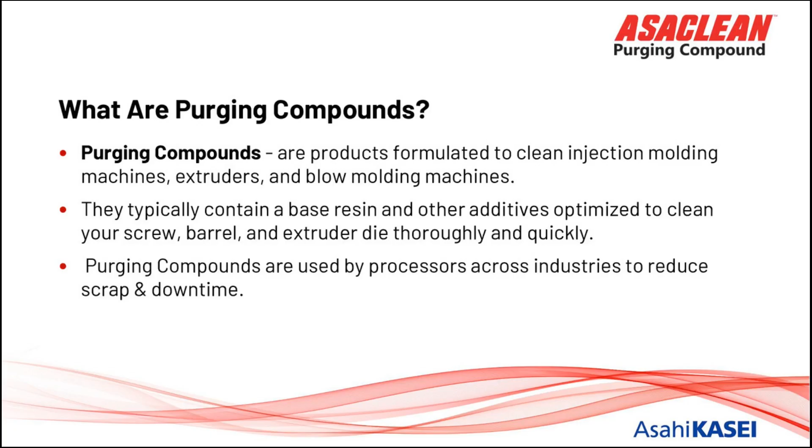Okay, Purging 101. First of all, what are purge compounds? Purge compounds are products formulated to clean injection molding machines, extruders, and blow molding equipment. They typically contain a base resin and other additives optimized to clean your screw and barrel, extruder, and die thoroughly and quickly. Purge compounds are used by processors across the industries to reduce scrap and downtime.

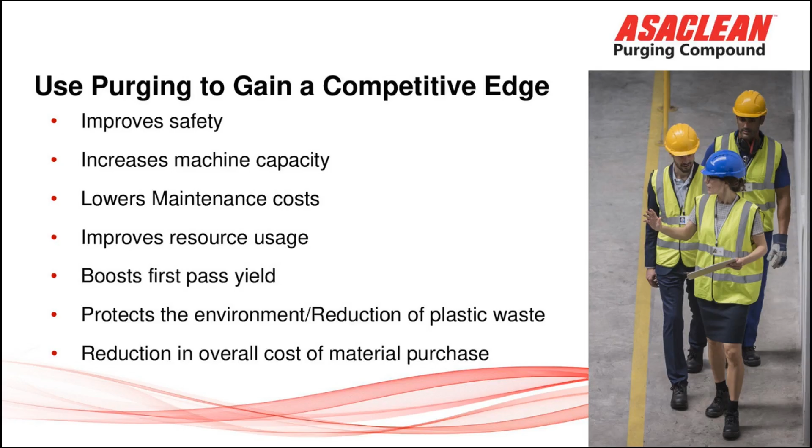Basically, purge compounds are going to give you a competitive edge. We're going to improve your safety, increase machine capacity, lower maintenance cost, and so forth. Most companies that use purge compounds see the benefits almost immediately.

When we're talking about purge compounds, we have to touch base on a few different topics. Obviously, we have to know what your process is: injection, extrusion, blow molding, what type of resins that you're running. What are we trying to do on this purge? Are we cleaning the die? Is it downstream equipment that's the problem? Are we talking about screw pulls? And then we're going to get into the types of purge compounds that could be effective in your specific situation.

As you see, there are 3 that we offer: mechanical type purge compounds, chemical purge compounds, and a concentrate that you can mix with any carrier resin, or the majority of resins that are out there. There are a couple of exceptions.

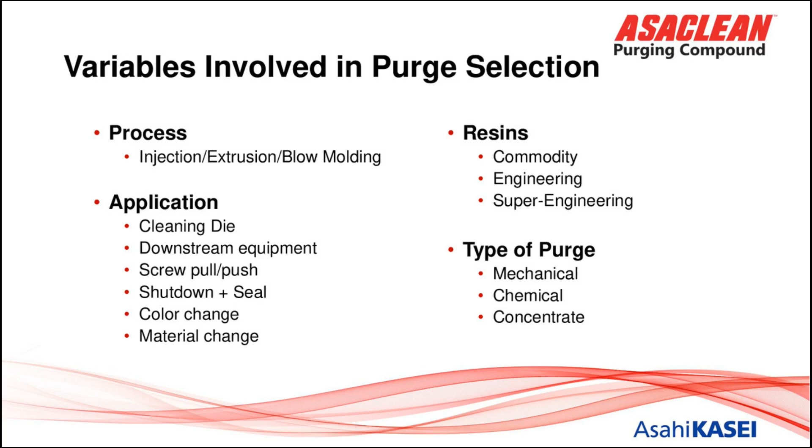We'll first talk about mechanical purge compound. Mechanical purge compounds are really easy to use, number one. You're basically running the product through the machine at a high velocity in effort to clean the machine. There's no soak time involved. Let the machine's power do the work.

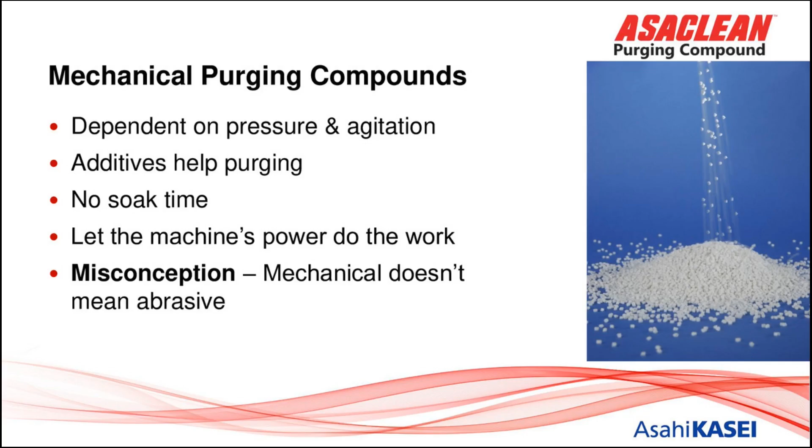Typically 2 to 3 system volumes of a mechanical purge will get the job done. If you were to use round numbers in case of an injection molder, if your machine's screw and barrel holds 16 ounces, you'll typically go between 2 and 3 pounds of a mechanical purge to get the job done.

Chemical purge compound, a little different animal. This is really, really good in extrusion applications, and the reason for that is because it expands. It gets into the negative flow areas very effectively, a little bit more effectively than a mechanical purge can. It's great for hot runner applications as well, and it gets into the negative flow areas and dead spots very, very effectively.

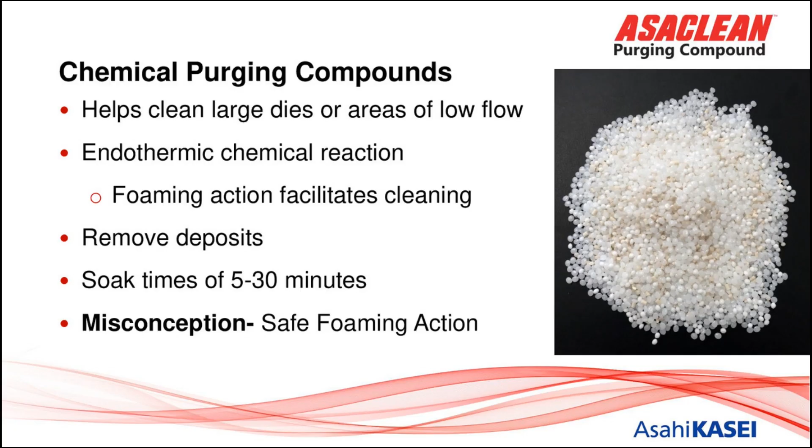Typical soak times can range depending on the situation that we're working on. I've used chemical purge compounds almost mechanically, just running the product through the machine to get the job done. We've had very short soak cycles from 5 minutes up to 30 minutes, and those longer soak cycles typically take place in really hard to clean equipment like extrusion blow.

Concentrates. This is a very unique product that, to my knowledge, none of our competitors have.

As I mentioned, you can mix our concentrate with pretty much any resin that you're processing, with a couple of exceptions. Typically, our mix ratios to start are 20% concentrate to 80% carrier resin, which makes the product extremely cost effective and works identically to our ready mix chemical purge.

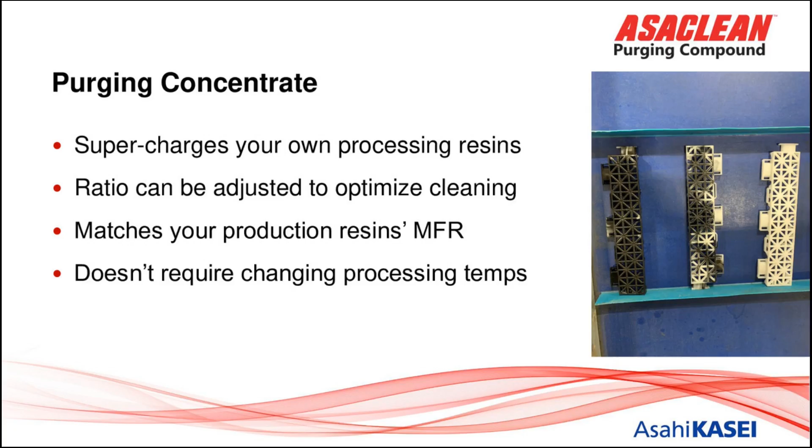When we're talking about injection molding, typical areas of hang up are the screw and barrel, the nozzle, the check ring, and troublesome hot runners or hot manifolds.

Essentially, we normally put the heat where the problem is. So in the case of injection molding and a hot runner, screw and barrels can mostly stay at operating temperature, and we need to heat up the manifold.

That's on a case-by-case basis, determine what you're trying to do and how you're trying to process. But the reason for that is we want to increase the heat in areas that are troublesome, number one, and that added heat aids in the purge process.

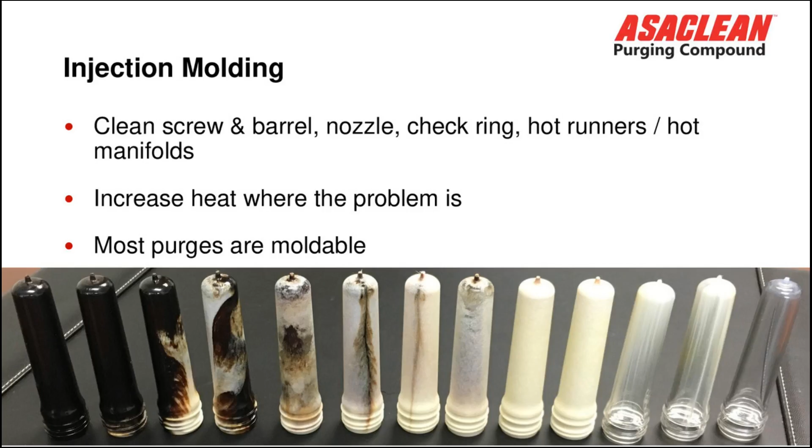One of the cool things about the products that we offer is most of our purge compounds are moldable, so you can actually make parts with the products.

Extrusion. Again, with chemical type purges, they're going to expand in low pressure environments. They work really, really well in twin screw applications. And it also cleans the areas on vented barrels close to the ports and vents.

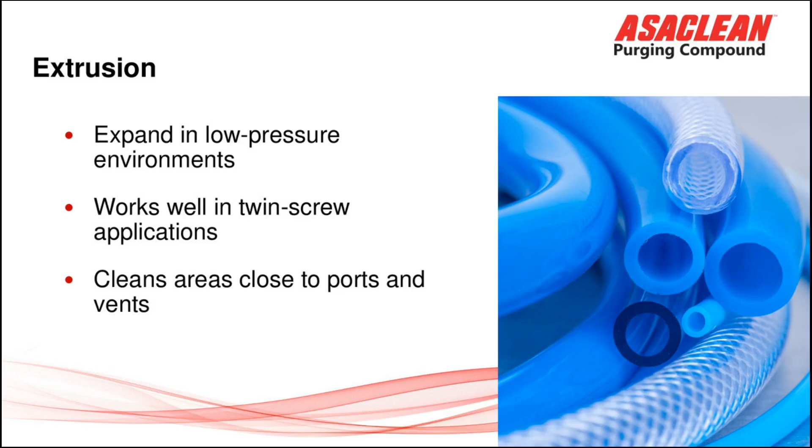Options that hurt efficiency: a lot of people I see use regrind. Now, regrind is not designed to clean. Anytime we compare a purge compound, a commercial purge compound, to a regrind, we normally come out way ahead, on average of at least 80% or better.

Other DIY options are largely ineffective and inconsistent. I can't tell you how many home remedies that I've seen over the years, but they typically just don't work.

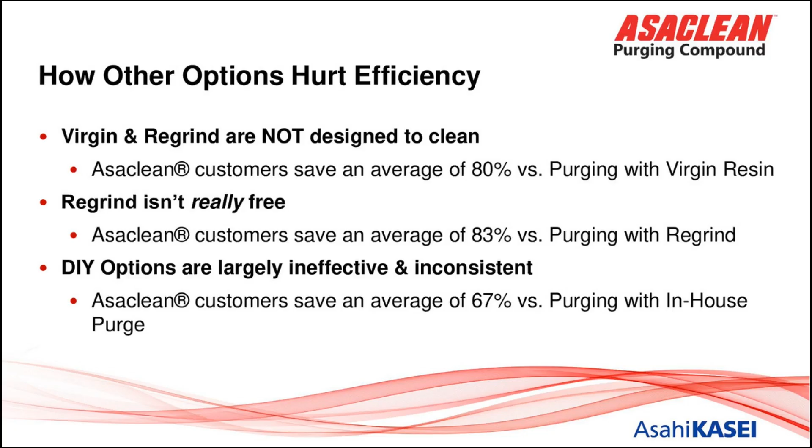Auto purge settings. Yeah, those sabotage your savings. And there's really two reasons for that. One size doesn't fit all—your auto purge settings are really not able to be modified to any degree. And auto purge really doesn't account for cost per purge.

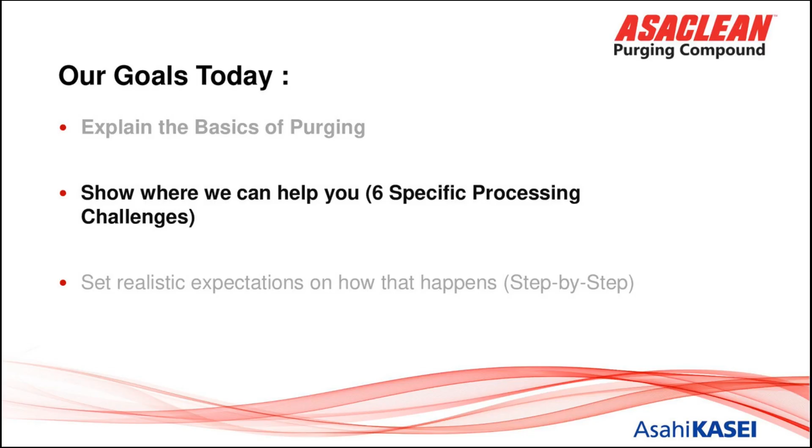We're going to start getting into the 6 specific areas where we could be of help. They are, and I'm sure you're familiar with these: color and material changes, contamination or black specks.

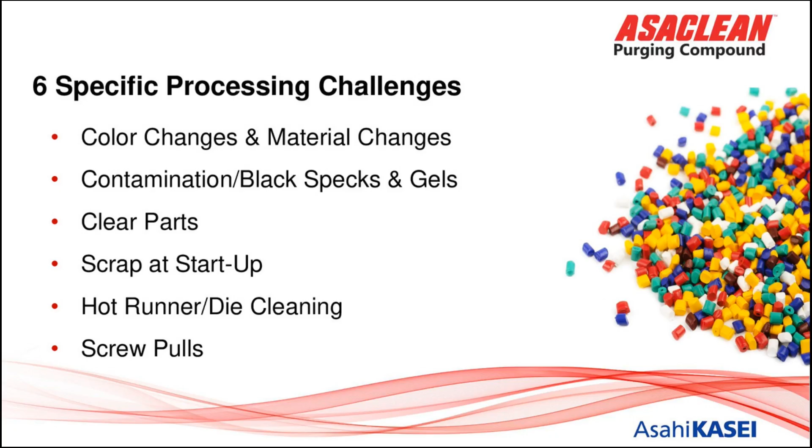If you're processing clear parts, those parts have to be absolutely perfect. We have a way to help you with that. Scrap at startup—startup can mean shutdown as well. Hot runner die cleaning and screw pulls. We're going to get into all 6 of those.

Now, this is just a basic diagram to kind of illustrate what happens. And we really don't care if you're running a commodity grade material or an engineering grade material. A lot of times, the majority of the time, the material is going to take the path of least resistance.

And if you could take a look at the sides of your equipment, you'll get color buildup, you'll get material buildup, and you can even get contamination buildup. And if you're not cleaning your equipment effectively, what's going to happen is it's just going to constantly layer and become even more of a problem the longer you continue on that path.

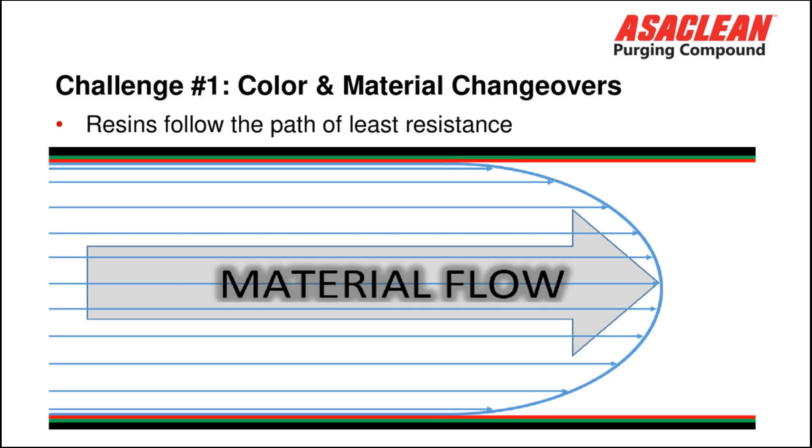In the case of injection molding, we're typically talking about the troublesome areas being the flights, the barrel wall, the check ring, and the nozzle. If you're talking about extrusion, it's not necessarily in the extruders—it's typically in the downstream equipment, like if you have static mixers, melt pumps, and naturally the die.

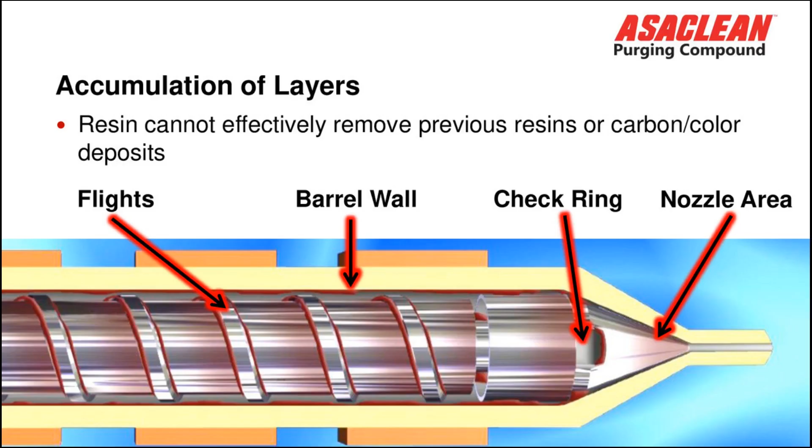Okay, this is an actual description of what we were able to do on one particular injection molding color change.

If you could see, before we started running a white polypropylene, it was taking about an hour and 45 minutes. Machine running cost at $300 an hour. Machine downtime cost $525. If you go right down the list, it'll give you a really quick explanation on what they were doing previously to using our product and what happened after.

Just in time alone, we were able to go from an hour and 45 minutes down to 30 minutes. We were able to reduce the machine downtime cost from $525 down to $150. The amount of purge material used was huge—they were using 350 pounds. We got it down to 80 pounds of our product. Cost saving was remarkable here.

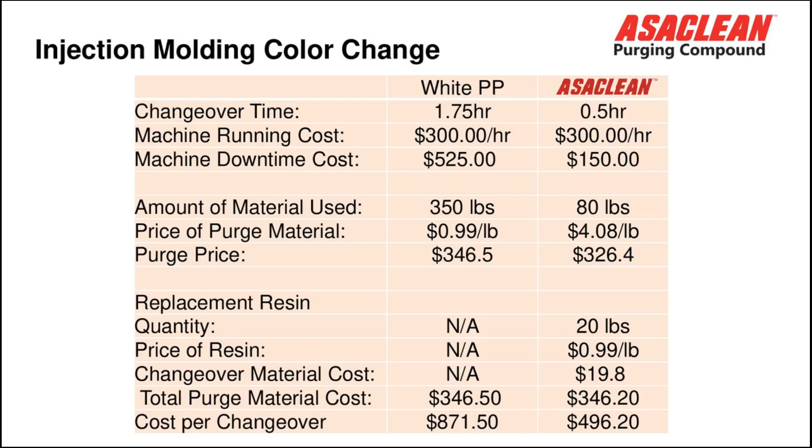If you take a look and amortize that out, a lot of these color changes or material changes don't seem like big deals. Okay, Chris, it took me an hour, it took me an hour and a half. But when we reduce it by half or even a third, they add up. In this particular situation, we were able to save over $90,000 a year at 43%. So little improvements have a really big impact.

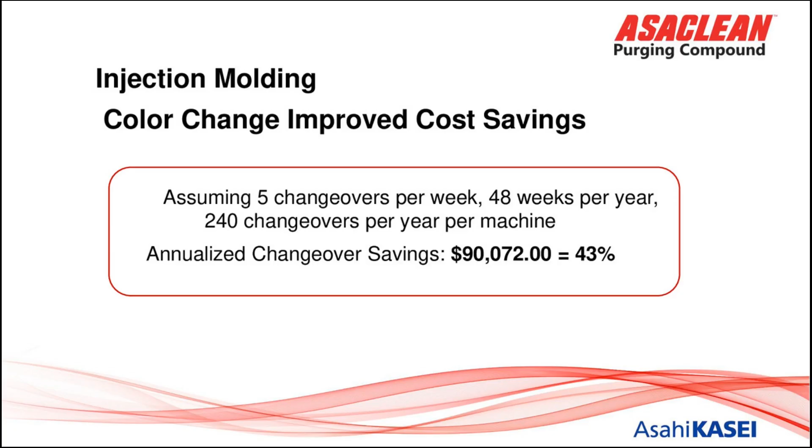Challenge number 2, black specks and gels. Again, this is an injection molding application, but the same thing holds true with extrusion. We're just taking a look at the screw and barrel. This particular situation is ABS running at 460 degrees Fahrenheit, where the heaters were shut off and ABS was left in the barrel. Consider this a shutdown. Obviously the heat doesn't go down to 0 or ambient temperature in a matter of minutes, it takes some time. You can see really quickly after an hour how this ABS begins to degrade.

And after 5 hours, it's even worse. If you were to use a purge compound on shutdown, it effectively removes that ABS or whatever material you're processing, so it cannot degrade due to residence time. Your startups are virtually going to be speck free. As you can see, the purge compound that's left in the barrel over the weekend will coat and protect your equipment from that happening.

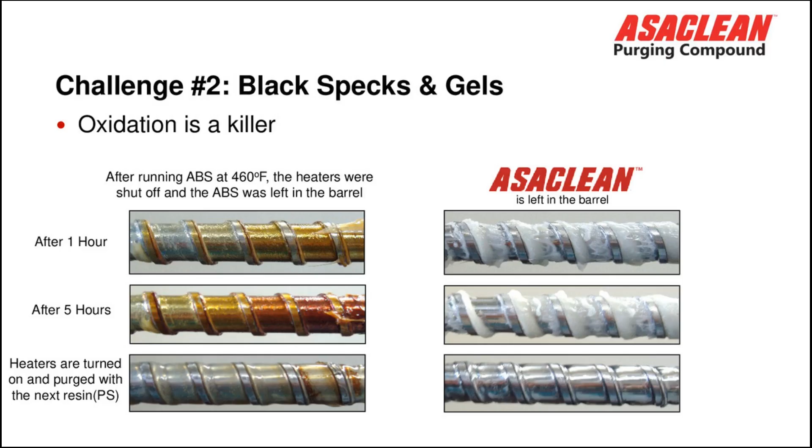Challenge number 3, clear parts. As I had mentioned, if you're running a clear acrylic or clear polycarbonate, a lot of the purge compounds on the market today have various different carrier resins. One of the primary carrier resins they have is polyethylene. In some cases, it's styrene, which is a little bit better. But if you're processing clear parts, you have to be able to effectively clean the machine.

But when you fire it back up again or make your next transition into a clear polycarbonate or clear acrylic, you've got to be able to displace the purge compound. It's no fun if you're able to clean the machine and it takes 2 hours to get the purge compound out. So this is one of the applications where our concentrate really comes into play. You can mix our concentrate with your clear material to effectively get the job done without any post-purge fogginess, milkiness, or hazing.

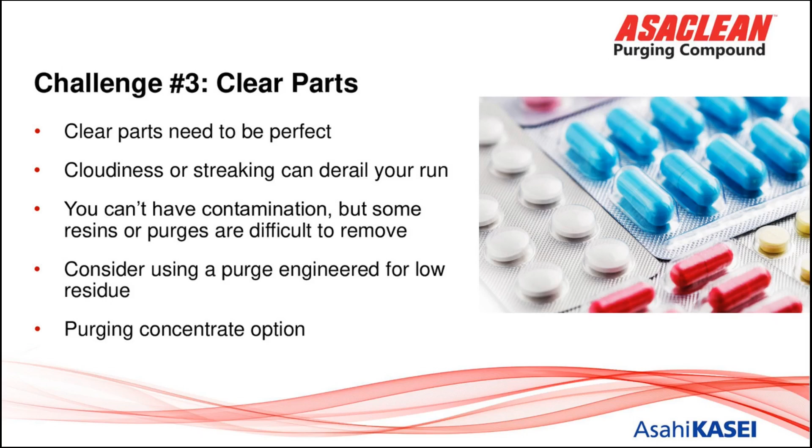One of the things I see quite frequently is we'll start out with a standard of performance when using our product, and we work very closely with you to ensure we get the best results with the least amount of product. Over periods of time, people come, people go, and people will take it on themselves to modify our procedures. It's no good. We really have to make sure the procedures we put forth in the beginning are maintained. One of the things you have in your corner when working with us is that we do our absolute best to work with your production members on the floor to ensure they get the best results with the least amount of product and maintain our procedures.

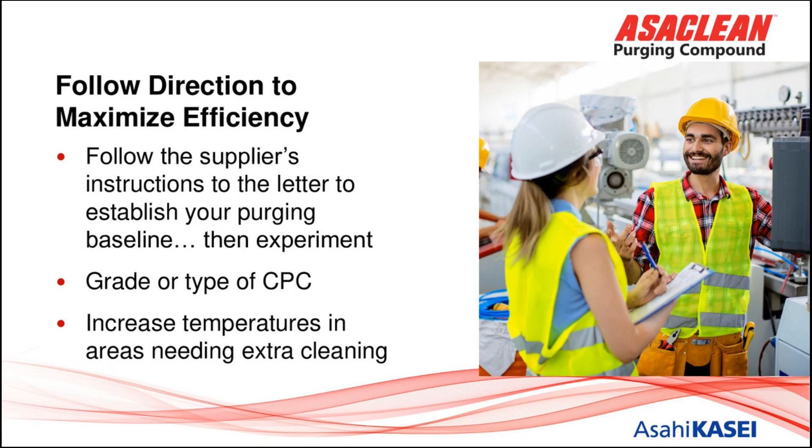Scrap on startup. We basically touched on this a little while ago, but if you take a look, again this is a natural ABS at 460 degrees, and you can see how quickly it will degrade over a period of time. Obviously you've got nice ABS at the start, 15 minutes later, 30 minutes later, 60 minutes later, you can see what happens very quickly. So it's important to be able to displace that production material as soon as you can.

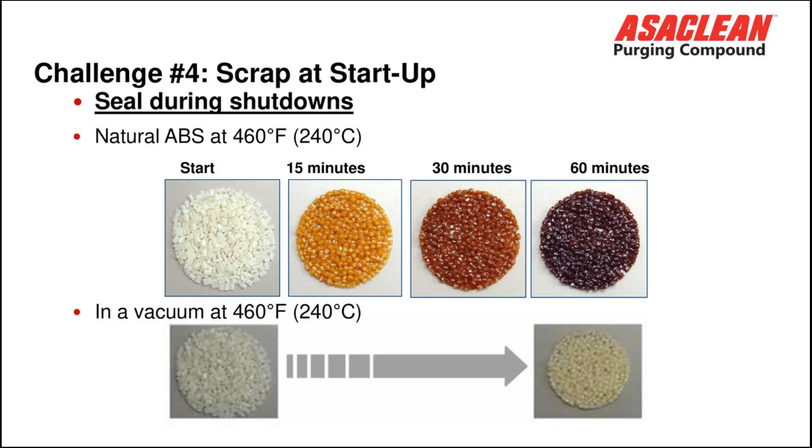Hot runner and die cleaning, very difficult situations at times. Hot runners, as you know, can have multiple cavities. If you're using a hot runner or hot manifold with multiple drops, some of the drops can clean out much quicker than others. With regards to die cleaning, pictured here is a basic sheet die. As you can see, any purge compound is going to take the path of least resistance, coming out of the die and working out to the outer edges. A mechanical purge can be used in some cases, but a chemical purge is much better in those types of applications.

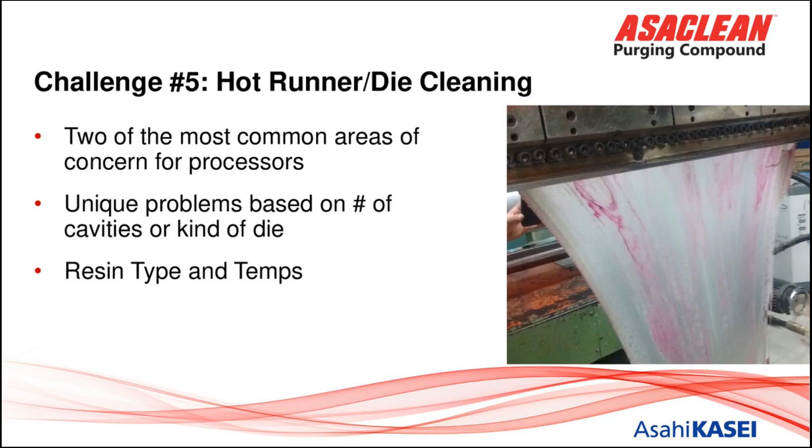Again, hot runner and die cleaning. Mechanical purges can be effective. Chemical purges can be effective. Every situation is unique. One size does not fit all in these types of applications.

That's why working with your personal regional technical sales rep, or myself, we'll nail it down to determine which grade would be best. We want to work with you to make sure we're all on the same page and in agreement. There are some cases where we'll provide no-cost material for you to test, and we will try both and see which one is a better fit for you and your team, to make sure we get the best results possible.

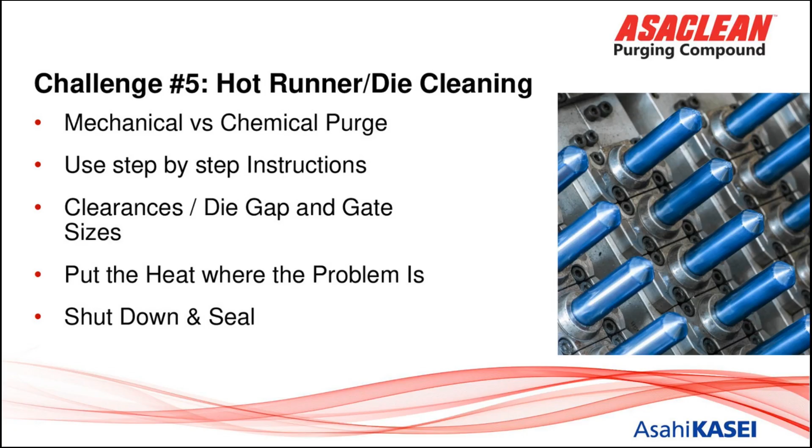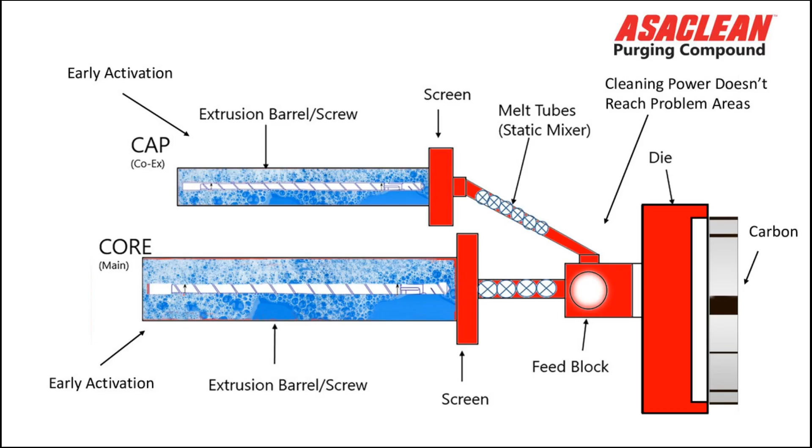Okay, this is basically a little schematic of an extrusion system. It's pretty rudimentary, but this is telling you that we're going to put the heat where the problem is. In an extrusion application, the extruders are really not the issue—I mean, they can be, but it's very rare. You can see the extruders are in blue. Anything downstream of that, such as the screen, melt tube, static mixer, feed block, melt pump, and of course the die, that's where we're going to put the heat to ensure we get the best cleaning possible.

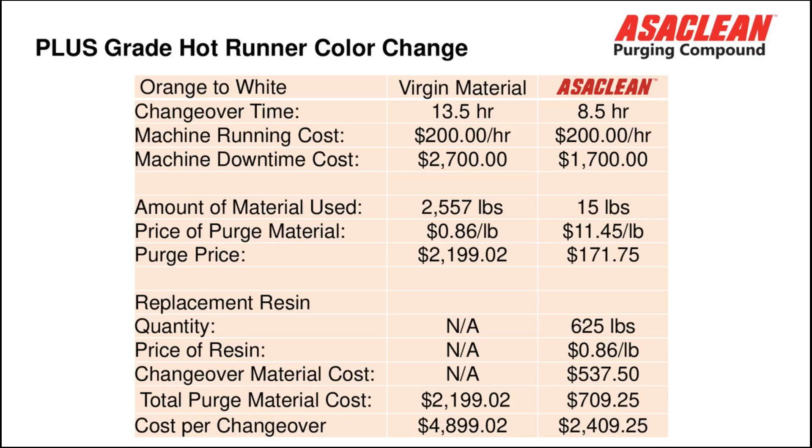Here again is a situation where we're using Plus, the concentrate, in a hot runner color change. This is pretty dramatic: 13.5 hours their way versus 8.5 hours our way. You can see the machine downtime cost is $2,700 versus $1,700, a savings of $1,000 right there. And if you take a look at the overall savings amortized out...

In this particular application, we're saving over 50%. At 144 changeovers per year per machine, that's $358,000 we just put back into your pocket. So little things, little changes make huge differences—not to mention the additional machine time we're giving you back to make saleable product.

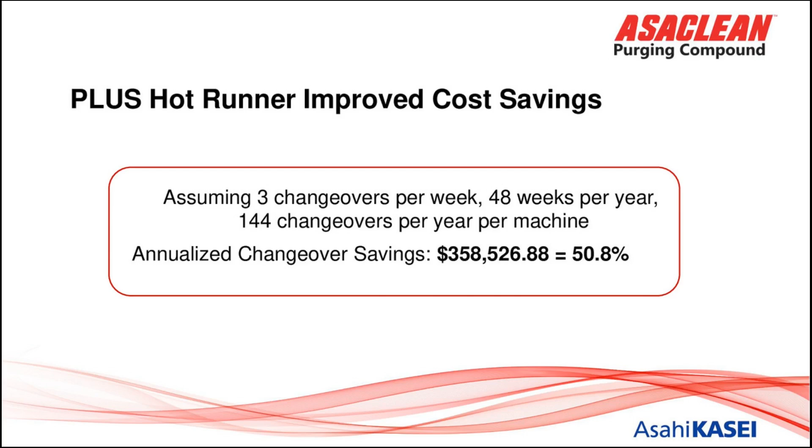I've had injection molders use it as little as 10%, and I've had extrusion blow molders have to up it a little bit to 25 or 30%, but it does afford you a range much more so than a ready-mix product would.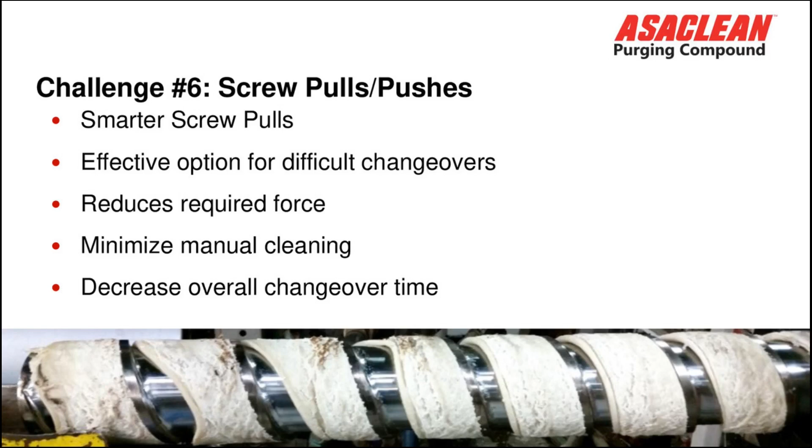Screw pulls—everybody loves screw pulls. There's a much better way to do that, guys. I can't tell you, even in injection molding applications, I've seen some screw pulls on mid-sized machines take 12, 15, even 24 hours. If you're talking extrusion, my God—6-inch screws that are 24 feet long could take several days. Well, we've got something that can help you with that.

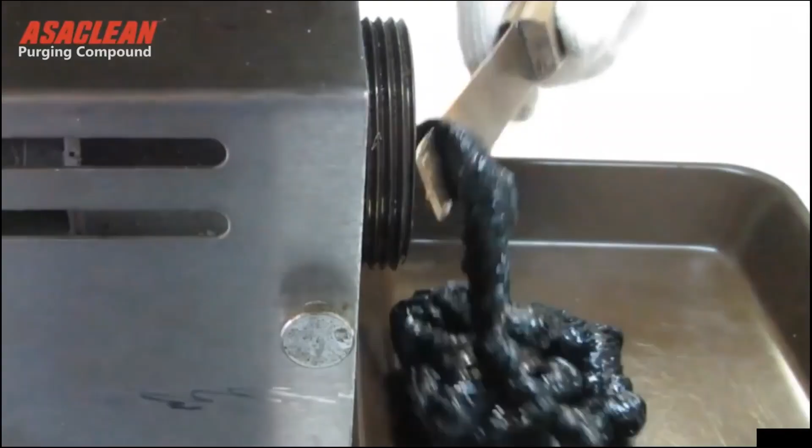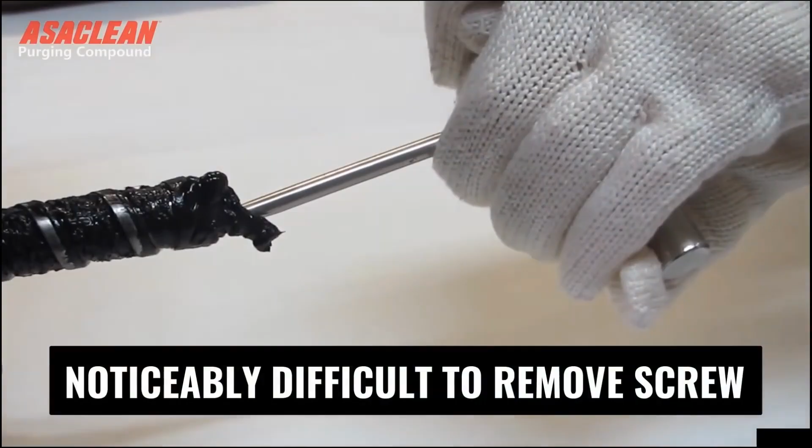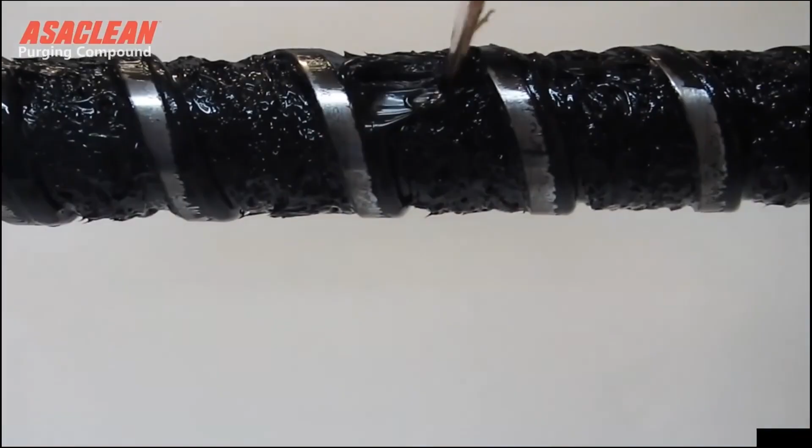This is a little video I'm going to show you. This is basically done with a product we offer called Asaclean EX. It's a heavily glass-filled material. This dramatization is actually done on a little small tabletop extruder currently running black ABS. You'll notice when trying to pull the screw, it's really hard, even on this little baby machine. I'm sure the injection molders out there will attest it's not normally an easy thing to do. The material is really cooked into the flights and the root of the screw, very sticky and very tacky. And again, this is ABS.

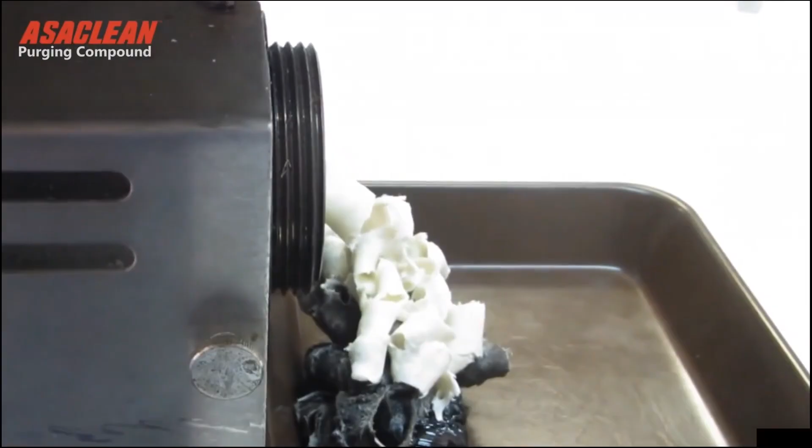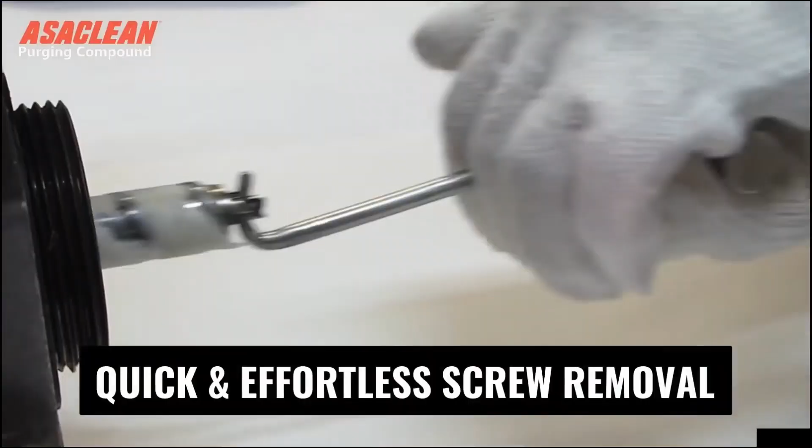Now what we're going to see is that same machine after being purged with Asaclean EX. The first thing you'll notice is the extrudate is nice and clean, meaning we got all that black ABS out of there. But this is the real magic, guys: the screw becomes very, very easy to pull out. As you can see, the Asaclean purge compound will peel off the flights and roots of the screw in one ribbon, like a banana. Your screw and barrel is going to look like it just came out of the box.

I can't tell you how many screw pulls we save annually with this particular product. I've used this personally on equipment—on 6-inch screws that were 24 feet long—and we had the same type of results. And again, here is another example of changeover time where a screw pull took 12 hours.

Guys, this is no joke: it was 15 minutes, from 12 hours to 15 minutes. Those are the kind of results you can expect using Asaclean EX. And again, one screw pull per month—amortize the savings, it's over $11,000 a year.

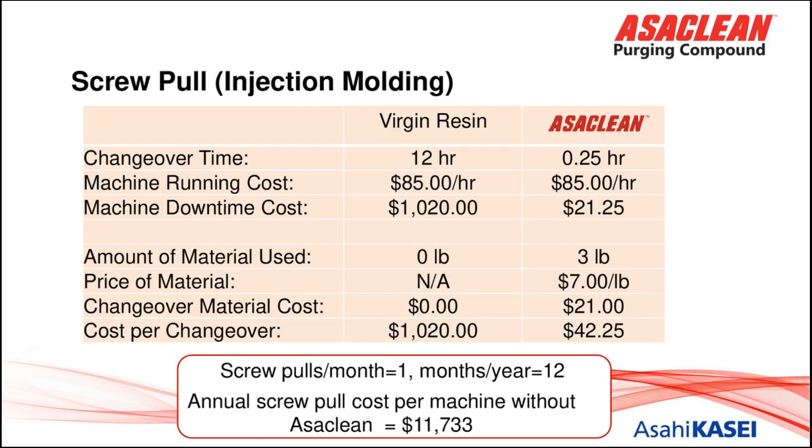If you're talking much larger scale, 30 injection molding machines, the numbers are huge, guys. The numbers are huge.

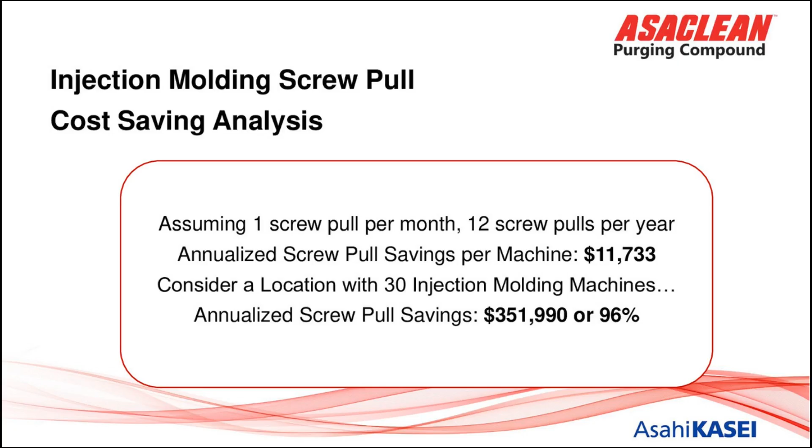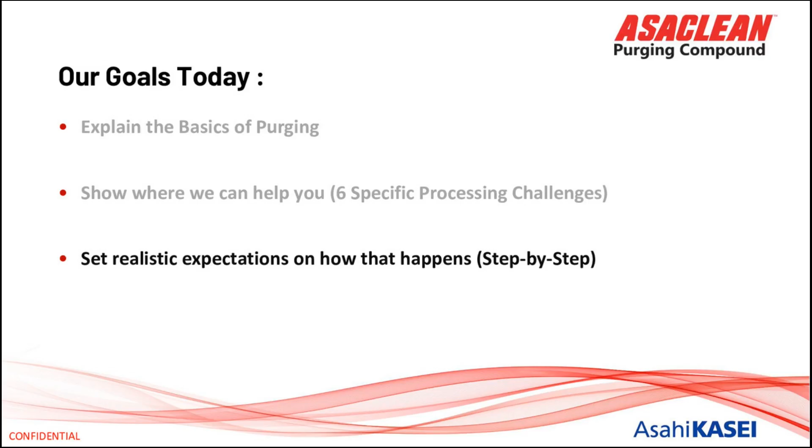Okay, let's talk about setting realistic expectations and how that happens. First of all, you're going to get an introduction of what we do and how we do it. We're going to diagnose the situation that you're having based on the years of experience we've got in extrusion, injection molding. It's a pretty quick process, guys. And we're going to work with you to determine which is the best way to go.

We're going to offer you a no-cost sample to test. We're going to develop a cost savings analysis that I'm going to get into a little bit later. We're going to help you with the trial. Whether it's verbally over the phone or a Teams call, you're going to have a representative work with your technicians or your maintenance guys before they actually put the product in the machine, so they're up and ready to go before they put one pellet into your equipment. And we're going to talk about possibly the introduction of a Purge program.

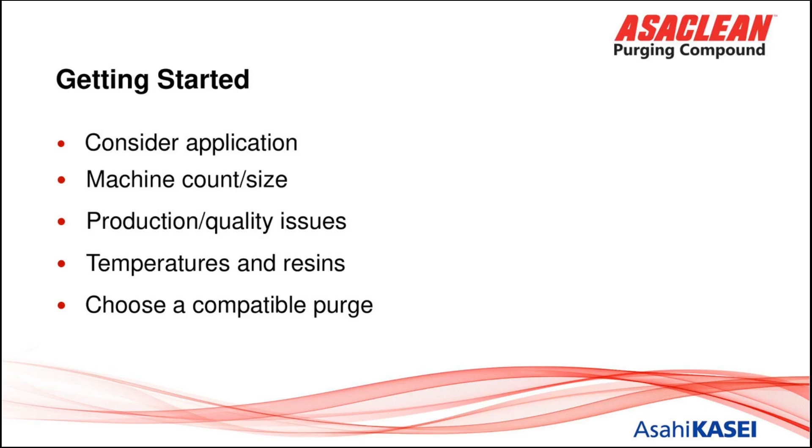What we do in this process is we consider the application we're working on, obviously. We try to understand your machine count and what the sizes are. We're going to understand the production and quality issues, the temperatures and resins you're processing, and we're going to choose a compatible purge.

Quote by Peter Drucker: 'You can't manage what you don't measure.' I can't tell you guys how many times I'm in plants and I talk to a production manager and I'll ask them, well, how long is a dark-to-light color change taking for you folks? And I'll get an answer. I'll ask a process engineer at the same company, I'll get a different answer. I'll talk to a first shift supervisor, I get a different answer. So it's real important that we're all on the same page as far as what you do, how you do it, and the time and cost associated with what you currently do now.

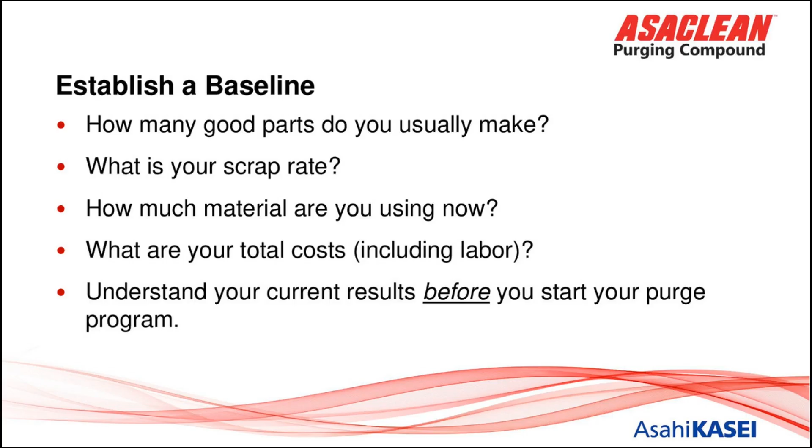So this is what we're going to do. We're going to establish that baseline. We're going to figure out how many good parts you normally make, what's your scrap rate, how much material are you using now, what are your total costs, and understand your current results before you start a Purge program.

We're going to analyze cost per purge versus cost per pound. We're going to make it consistent, and we're going to keep track of these results over time. In the very beginning, we're going to be able to establish that baseline of performance, and we want to make sure that we maintain that baseline of performance so it doesn't slip.

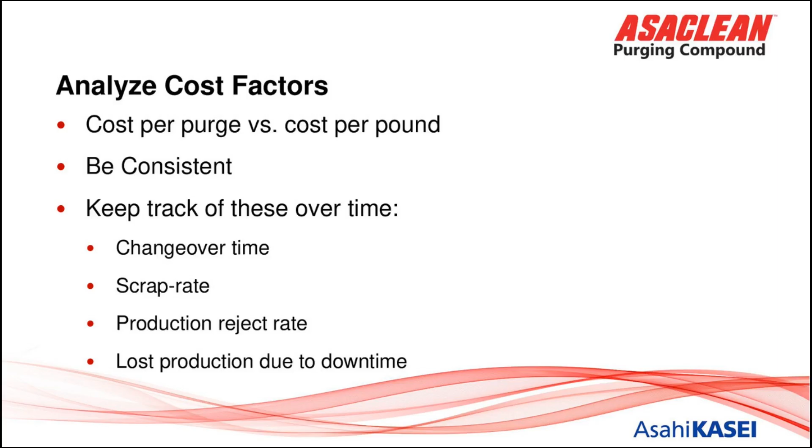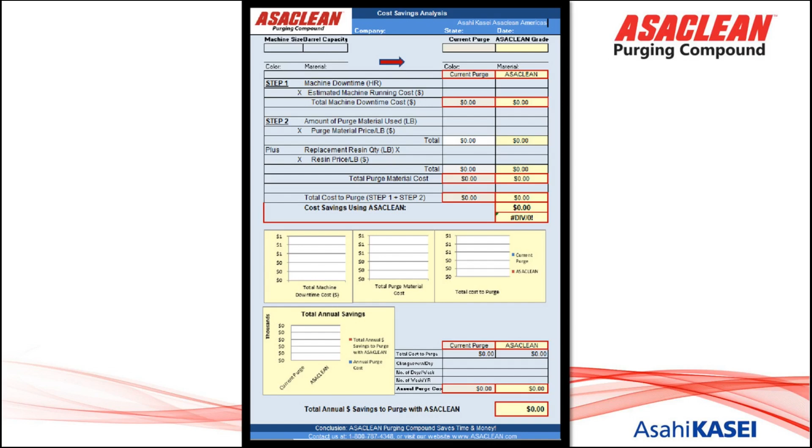This is one of the coolest tools that we have, guys, and all of you will have access to it. This is what we call a cost savings analysis. It's actually on our website, or we could provide it to you, and it's a live document. So basically, all you really need to do is plug in the information on the left side of what you do and how you do things. And then we're going to compare that to what the ASACLEAN Purge compound can generate. It's going to actually show you the savings as soon as you hit the enter button. Very, very good tool, and we use it quite consistently all the time.

How to use the Purge compounds correctly. Again, just making sure that the standard of performance is always being met. People are always asking us for written procedures, which we're happy to provide to you folks. But understand, those purge procedures are written for the majority of situations. So it's not to say that we cannot improve upon them.

The object with any purge compound, working with your technical sales rep, is to find the sweet spot. As I mentioned, in worst case situations with a chemical purge, you might have to soak it for 20 to 30 minutes. But I've also seen in extreme situations, like extrusion blow, where a 5 or 10 minute soak cycle could work. So working with your technical sales rep, we'll fine tune these procedures and make sure they're used in the proper way, getting the best results with the least amount of product and saving the most amount of time possible.

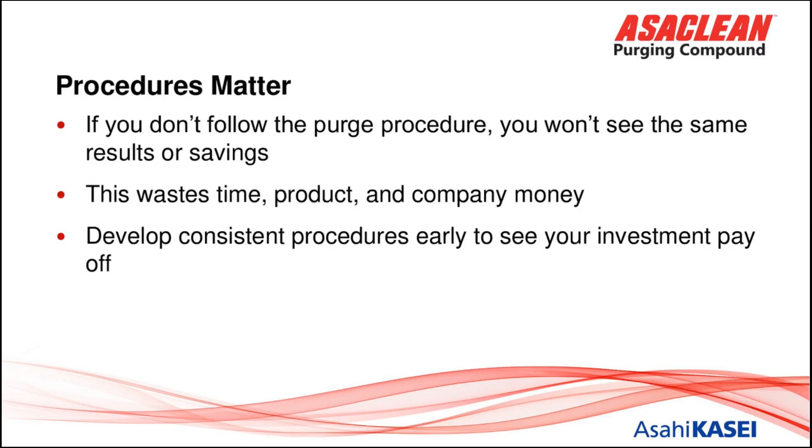Again, procedures matter, and for all the reasons that I just explained.

A couple of differentiators: we've got really good products, guys. To the best of my knowledge, I think we're up to 20 different products, mechanical and chemical purge compounds. So whatever the situation, I'm extremely confident we're going to have a product that'll fit your needs.

We've got a team with an incredible amount of experience, over 200 plus years of injection molding and extrusion experience. And most importantly, our products are placed in warehouses throughout the United States and Canada, so you get just-in-time delivery.

You're never going to see us run out of product. It just doesn't happen. We have extensive inventories in our warehouses. Transit time to any place in the country is typically 2 to 3 days.

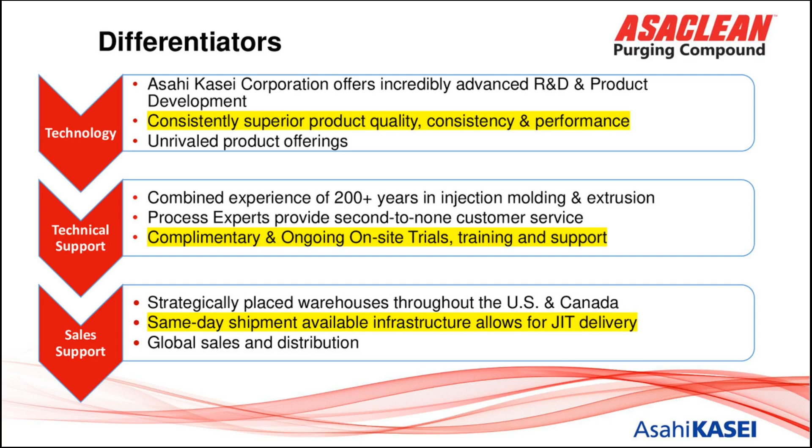Again, really, really good products, consistency and performance. You get complimentary on-site trials, training, and support. And same-day shipment is available for just-in-time delivery.

Quick summary: 200 years of combined plastic processing experience. We've got a grade that's going to suit your needs, guys. We're leading the industry in distribution and product availability, engineering expertise with the backing of a very large company, unparalleled customer support, dramatic cost savings, and just-in-time delivery.